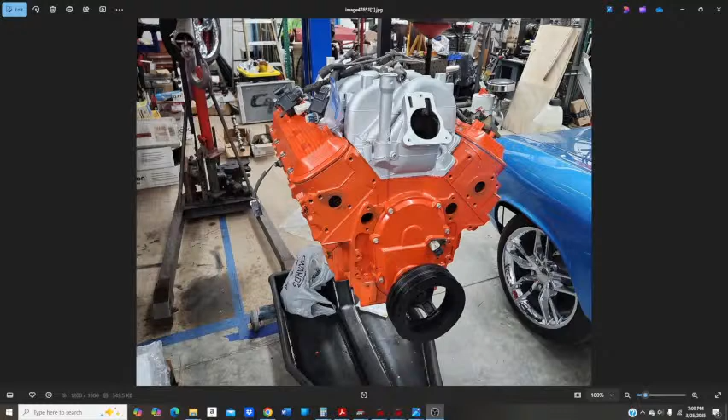So here's Scott's engine, the 8.1 liter. Being we were putting it in an earlier Chevy truck, we decided to go back with orange rather than the corporate black. Yeah, it's all together and it's up at Doug's, and we're getting ready to install that bad boy - it'll probably go in next week.

Probably this week will be tearing it down. I'm gonna end up having to pull the entire front cap off - some of the panels need to be blasted and rust repairs done, stuff like that. So I figured it'd just be easier to go ahead and pull the whole front cap off the truck, that way I can get the motor and tranny out and put the new motor and tranny in using Doug's fork trucks. That should make it a lot easier to deal with.

So that was one thing I wanted to show you. Wanted to show you Chuck's project, get you caught up where we're at with it. Let me fix some videos here, some pictures here - this thing's backwards. How's that? All right.

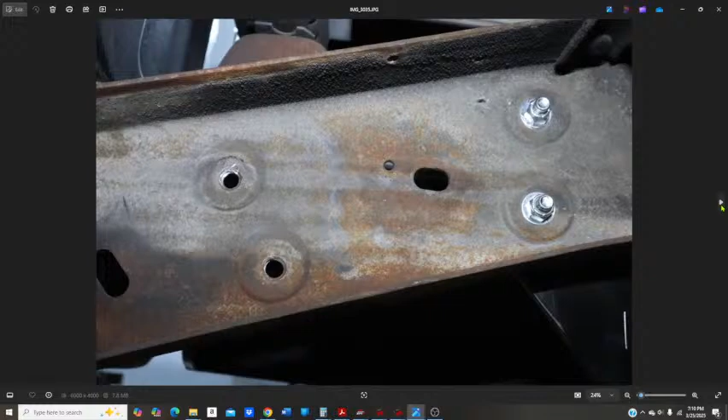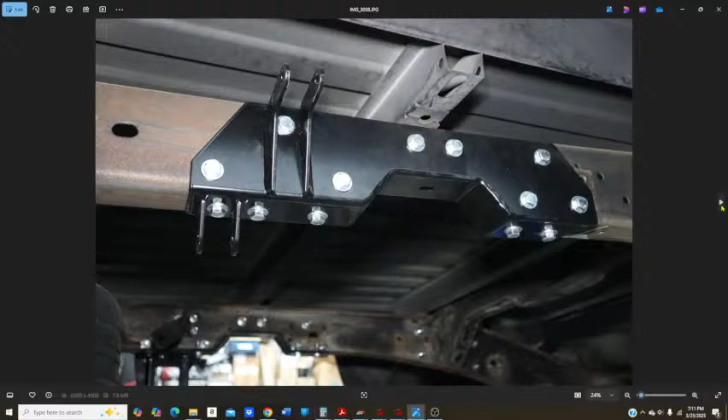So show you some of the older pictures we had. Here's the frame bolting in some of the suspension joints where you had to drill holes and mount brackets and stuff. You had to take the leaf spring stuff off because it's going to be a 3-link when we're done. Had to C-notch the frame, which was a bolt-in kit also, which was really nice.

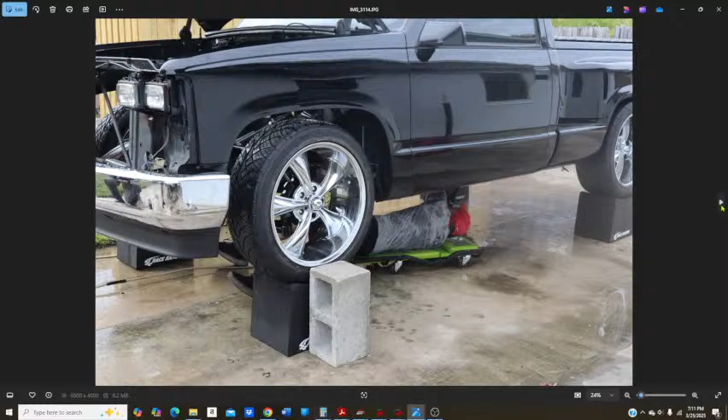We get through these pictures - we had it kind of crazy. I should have thought about this at first, I said I thought we could scrape the frame, and Chuck and Dave kind of vetoed me and said no, we need to roll this thing out and pressure clean it. So we hung the suspension back under it, got out on the driveway, and Chuck went nuts in there with the pressure cleaner. Just a couple pictures we took of that stuff.

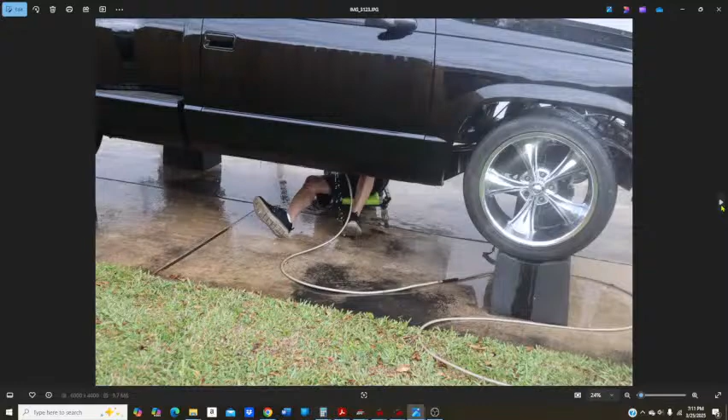Didn't need to go that far back.

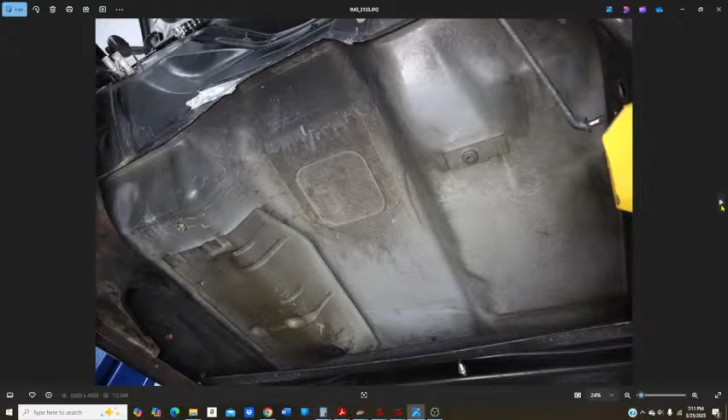So it looked pretty good after it started drying up, and then he went through and painted the entire chassis with POR 15. I didn't realize I started back that far.

These are all pre pictures. Here's some with the old brakes, and here's the new front brakes all mounted up and everything permanent, and the rears. So it's got 14-inch rotors front and back now, 6-piston calipers in the front, 4-piston in the rear.

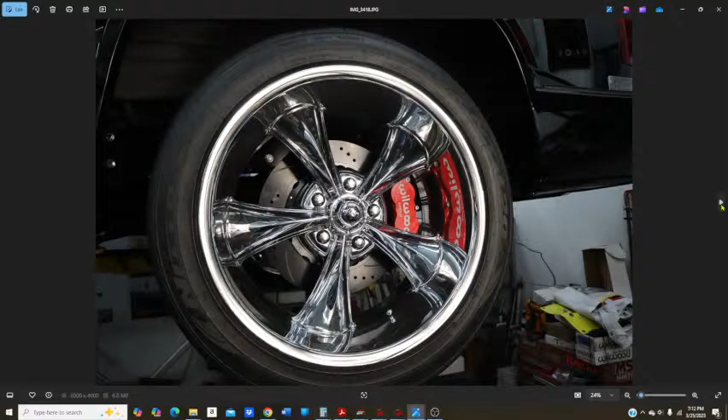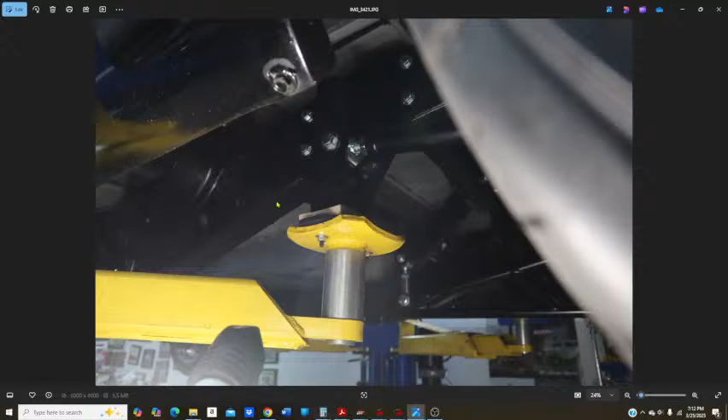You can see the frame now is all painted up, got the coilovers in and everything. We only went with single adjustable because he's really not going to track the car, it's mainly just going to be show and cruise and stuff. There's that bracket for the trailing arm and frame painted, diagonal and stuff, so you can kind of see where we're going with it.

Front suspension all back together now with the new spindles and all that. The tie rods are going to get a single adjuster there, those haven't come in yet. And then just some pictures from underneath.

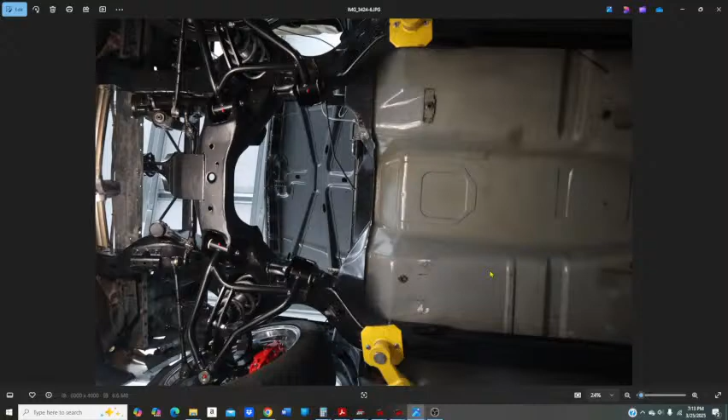Looks a lot nicer with the frame all painted. And that's the underside of the cab, which Chuck just washed with mineral spirits and soap and got all the road grime off and stuff. And the factory epoxy on the floors was still in really good shape, so that came out nice.

Got a couple little touch-ups where we cut some heat shields out. The truck bed still needs to be painted, but that's the picture.

So it's got outer control arms, a third link in the center, and then a Panhard bar in the back, so it should be a really, really good ride. We went ahead and welded the tubes on the 10.5-inch rear end, we're going to stay with that. It's got 3.73 gears, should be fine for the twin turbo motor.

So there's a picture. Obviously you can see this section and the firewall is what we need to have painted now. So that's where we're at with that. That'll go down to the paint shop and they'll do that in gloss black.

He's already got the inner fenders. We're going to do them in gloss black, and then we'll be ready to start mounting the engine and transmission in that thing. So that was a good progress made. Now it can be rolled around the shop and stuff like that.

So that was pretty much most of the stuff this week. Now I guess we'll kind of get into the Holley stuff. Let's see, I want to start out with Mike's car.

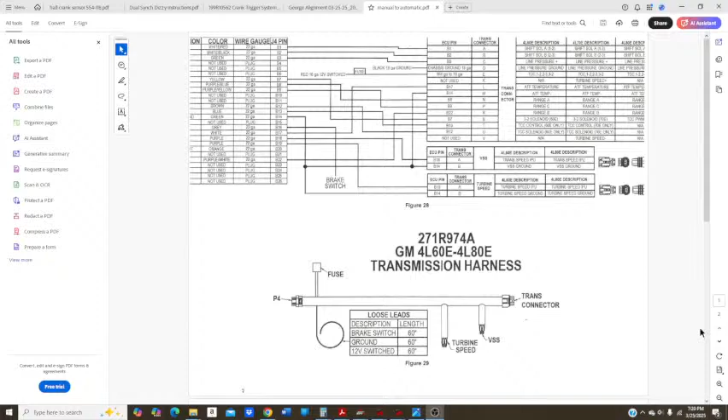If you guys remember from last week, we were working on Mike's 66 Chevelle, trying to get the transmission to shift. This was the Holley transmission harness for operating that, and then we were talking about this deal here, which is something I came up with.

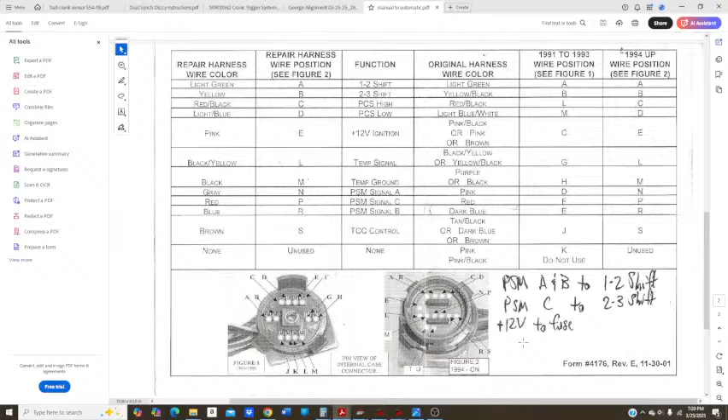Where you could make an automatic transmission into a manual shift by using the pressure switch manifold to energize the shift solenoids. So we went ahead and did this with Mike's car.

We went out on Saturday and did some data logging, and I wanted to show you this, it's pretty good stuff. One issue we had was we knew the Holley would data log the output, the command to the 4L80, and this teal line represents the shift position, the command the transmission is sending. But our problem was we still didn't know what the transmission was actually doing.

So one of the things I did was take two voltmeters and back probe the J4 connector on the Holley, with the ground side of the voltmeter going to 12 volts. Now we could watch the two shift solenoids.

The way the 4L80 works is you ground the 1-2 solenoid, and that gives you first gear. In second gear, neither solenoid has a ground. In third gear, the 2-3 solenoid is grounded and the 1-2 is not. Then in fourth, both solenoids are grounded.

We were able to drive the car around and watch this. I could have created a file and put the data in the Holley data log, but we were trying to do this quick and easy, so it was just easier for me to sit in the passenger seat and read the voltmeters. Unfortunately it wasn't good for demonstration tonight, but anyway, let me go back to the data log.

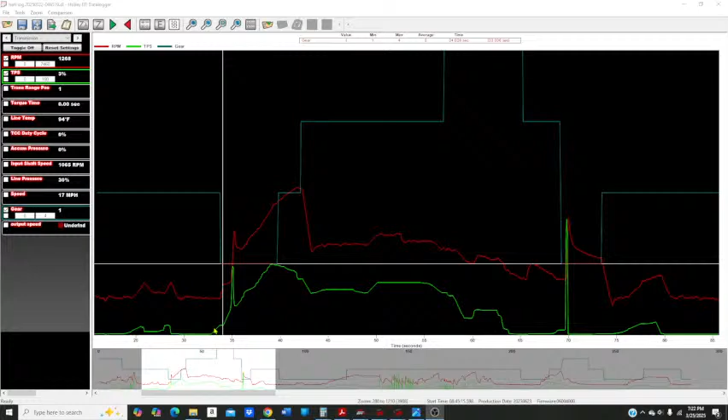So here's our cursor line where we're at, 1200 RPMs, 3% throttle, in first gear, rolling about 17 miles an hour. The green line here is speed. So we can go back to here. Now we're... oh, I don't have speed on there, sorry. So there's speed, so we're actually driving down the road.

So there, Mike puts it down into first gear. You can see over here the transmission is looking at the pressure switch manifold, and that's telling the ECU what gear we're in. So we're in first gear because it sees pressure through the valve body. And then we're accelerating through.

You can kind of see on this gold line here, we're starting to go faster. Then we get up to here, and right here Mike shifts the car into second gear. But you don't see, on this red line, a drop, because it didn't shift. Even though the computer commanded second gear, and I'm watching the valve body and the voltmeters, both voltmeters went open, so both shift solenoids were open, but the car still did not shift.

So then we continued on a little bit faster. He revved it up to almost 4,000 RPM. It still didn't shift. He finally pushes it into third. The Holley sees the pressure switch manifold shows that it's now in third gear. The voltmeters are now showing me the 1-2 solenoid open, the 2-3 solenoid grounded, commanding third gear. You can see by this red line here a significant drop in RPM, so it did make the shift. Let me make that a little bit more pronounced for you.

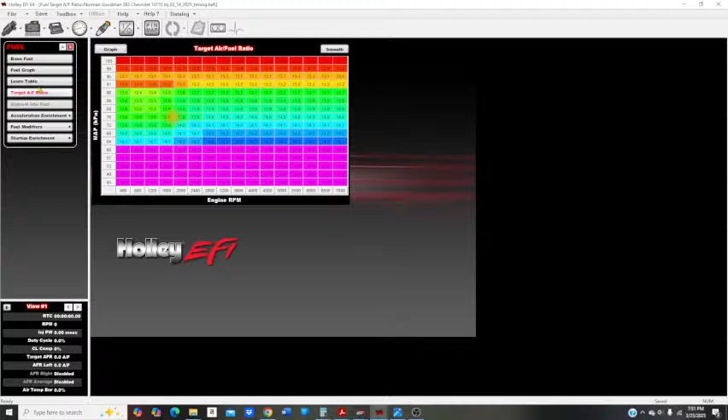Everything was pretty good. There was a fuel graph in here, and that one was already smooth. All right, so let's go to the data log.

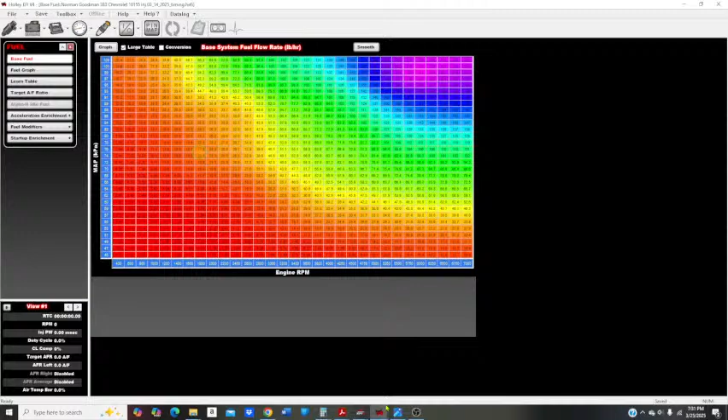So we go for a ride in this car, and sure enough, it's got some anomalies here. I really didn't notice anything here, but here we're at 1600 RPMs. We don't have speed because it's a manual transmission, but it was off the target a little bit.

Blue line here, kind of hard to see that blue line, but that blue line is the target AFR. Let me switch the screen to white, see if that's any better. Well, we'll switch back and forth because it's better for the fuel. So here's our target AFR line, and this green is where we're actually driving. So let's go back to the black screen. Why didn't it go back? All right.

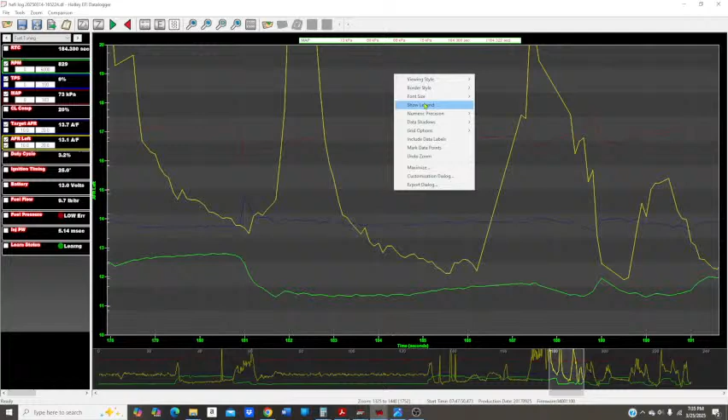If you go like in here, you can see, let me switch this back to white again. You can see here there's dips in the red. Those are load positions. So the load was changing, RPM was changing, but the computer still saw that it was in idle circuit. Anything under 1% TPS is idle. So at that point, you got idle compensation, timing compensation coming in. So it's jacking the timing around and doing a bunch of crazy things.

So I just kind of snugged it down. We limped it back to the house. I reset TPS, and we drove the car around, and it was perfect.

So again, one of the things that, here he thought that something happened to the tune. It got corrupt, had maybe a bad injector or a vacuum leak. He wasn't sure what was going on, but luckily, rather than going into it on his own, he brought it over and I took a look at it. And like I said, we figured it out. Luckily, I didn't have to spend a lot of time on it.

It came up pretty quick, but it just goes to show when you are doing tuning how critical it is to make data logs so that you can hunt for anomalies. Now, I didn't see the TPS at first, but before I dove in and decided to start changing stuff, I started going PID by PID, sensor by sensor, to see what was going on.

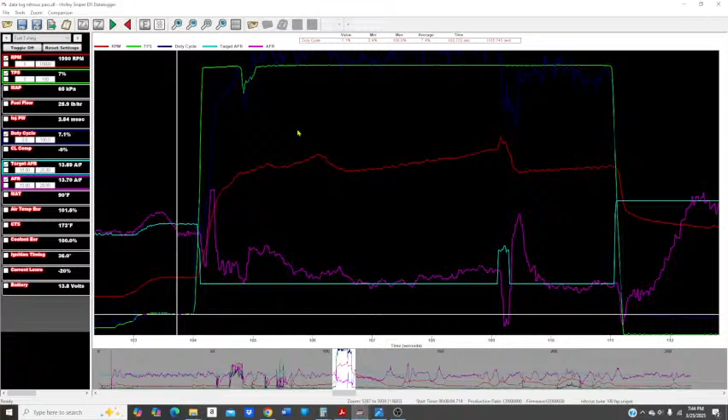650-ish horsepower, all depending on the efficiency of the engine. So what we can see here, let's put the cursor back here. So here he's at 1990 RPMs, 7% throttle. I don't think the truck has a, let's get this closed loop comp off, we don't need the closed loop comp on it. I don't think he's got a trans brake, I think he was just power braking it.

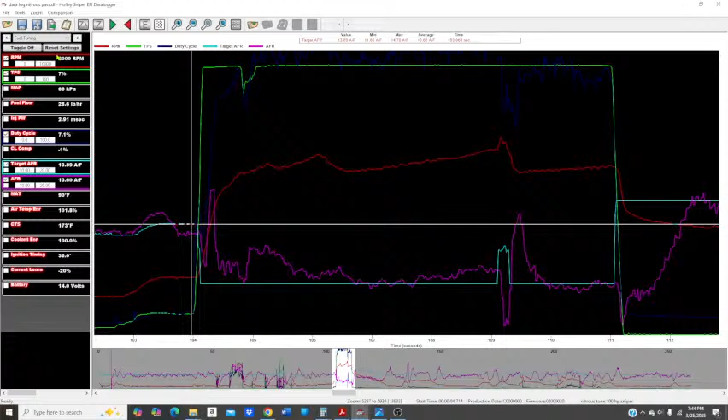So tree goes on. Let's see, we don't have nitrous on this one. Let me switch tunes here where we get the one with nitrous tuning. So we have nitrous also. Stage 1, base fuel, we don't need base fuel pounds. Fuel flow, we're good there. We have target and actual, okay, we're good there.

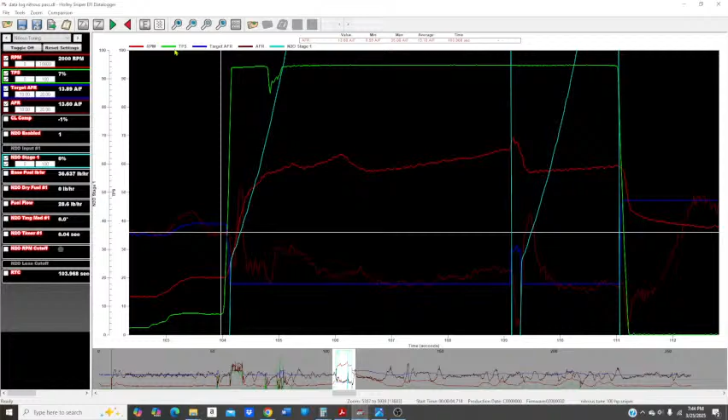This one does not have duty cycle, so let's add duty cycle real quick. So we go into editor, go to nitrous, let's get rid of real time, and we want to put duty cycle of the injectors, because our concern was if we're running out of injector while the nitrous is on. Well, I didn't drop it in the right spot. Where was it? Okay.

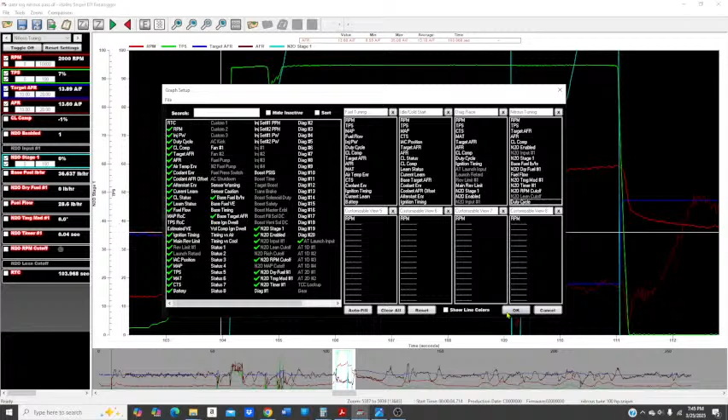All right, so this purple up here, good, this is a much better color. This purple is the injection, fuel injector duty cycle. So here he's on the starting line, takes off, stomps the throttle. This teal line here is the nitrous coming on. Now it's got a progressive controller on it in the Sniper. That's the beauty of all the Holley products.

They've got progressive controllers built into the software. So we got that progressive going, but it's a pretty steep ramp. And right here, it tries to spin the tires, and so he kind of pedals the throttle a little bit, catches the tires, and keeps going, and the nitrous keeps engaging.

But you can see at our duty cycle down here, 101 duty cycle, so we are out of injector. And you can see the motor's a little lean right there. And as we go through, it kind of stays right about that same point, but the AFRs are a lot better.

And then out here, you'll see the red line right there. Let's go back here to that point. There, the motor hits 6,900. So at that point, what that is, when it shifted into 2-3, the transmission flared on the shift. So the transmission may need a little bit of cushion there, which then it over-revved, and there's an RPM safety on the nitrous, so it shut the nitrous off. And then once the transmission shifted, then the nitrous turned back on, and the progressive controller ramp came back in. So just kind of showing you how much information you can get on here.

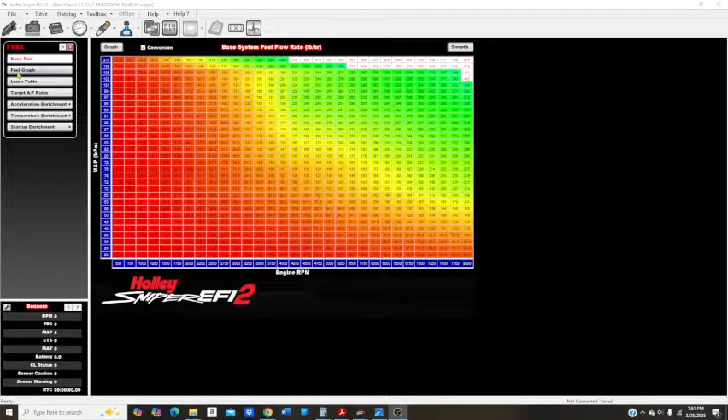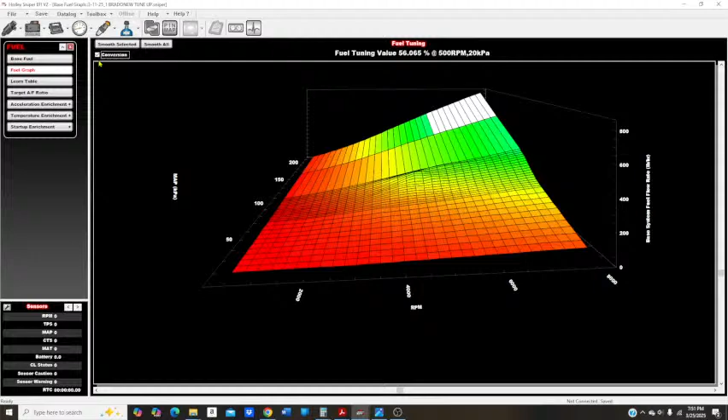So we pull up the fuel graph. You can see in the center here, there's a pretty big bump in there. And the reason that is, normally you can put in a conversion -- it's not as exaggerated in pounds per hour, but in VE, it's a pretty crazy looking hump.

So what happened was they took the truck to Run to the Sun, and he's cruising up and down the highway, and he said the more they drove it, cruising-wise, it started running pretty terrible.

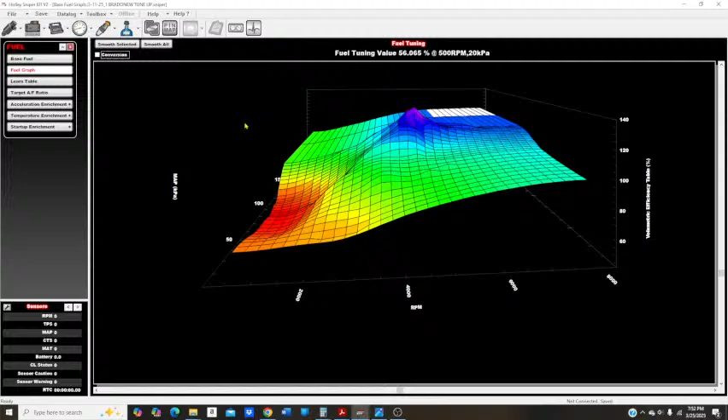So what I've found in past experience is when you have a camshaft that's got a lot of overlap in it, what will happen is with the closed loop and learning -- so on the Holley system, kind of like an OEM, your closed loop parameters is your short-term fuel trimming. That's what I call a knee-jerk reaction.

The computer sees the motor's lean, it makes a quick adjustment to that cell. It sees the motor's rich, it makes a quick adjustment to that cell. It doesn't record that correction, it just makes it right now. And then when you move away from the cell, it goes back to the original base tune.

Now your learning parameters, just like in an OEM computer, would be your long-term trim. So what long-term trim or learning does is it watches closed loop, or short-term trim, and it says, hey, whenever you're on this cell, you're always adding, so let's go ahead and learn and add a percentage to that cell so you don't have to work so hard closed loop.

And that's how that all works. So the closed loop is a real quick, not-recording deal. And then the learning watches it and says, hey, you're always skewing lean, you're always skewing rich on these cells -- let me go ahead and make a correction in the learn table over top of the base table. That will make it so the closed loop -- the whole idea is to have the least amount of adjustment.

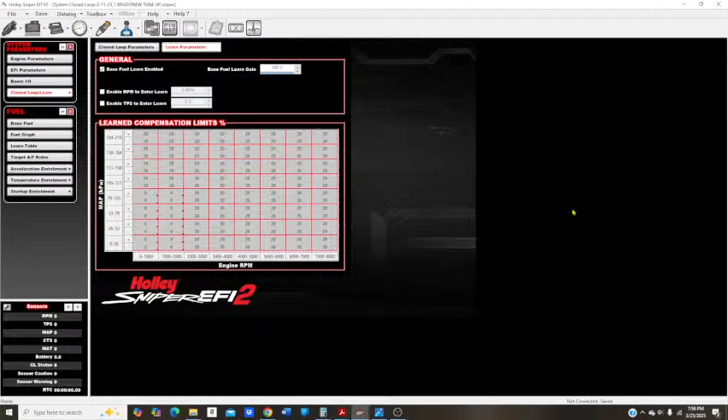So that's what I did. We sent them the file back and installed the tune. The rest of the weekend, he said the truck drove like a million dollars. So again, using your data log and stuff like that, you can come up with this stuff, and it just helps.

It aids in making you a tuner, or a better tuner, with minimal amount of experience. It works really well. The nice thing about all this, when you're in a carburetor, you're going by seat of pants. You might have a vacuum gauge on the car, you might have a wideband, but there's no recording, so you can't take your information and go talk to somebody and say, 'Hey, what do you think I should do here?'

I'm making adjustments, but it may not be working, or it is working, or whatever. The beauty of EFI is you can take your tune file and your data log file and send it to somebody like myself or any other tuners, or even guys that are just helping out, and we can together go over these files and all learn new tricks and new things we may not have been aware of before.

It just makes it so much easier to get your vehicle running properly, and all those fun things. So I just thought it was a good thing, where these are actual situations I've run into in the last two weeks, and I thought it would be a good case study so you guys could see how I used the information, made corrections, and solved the problem.

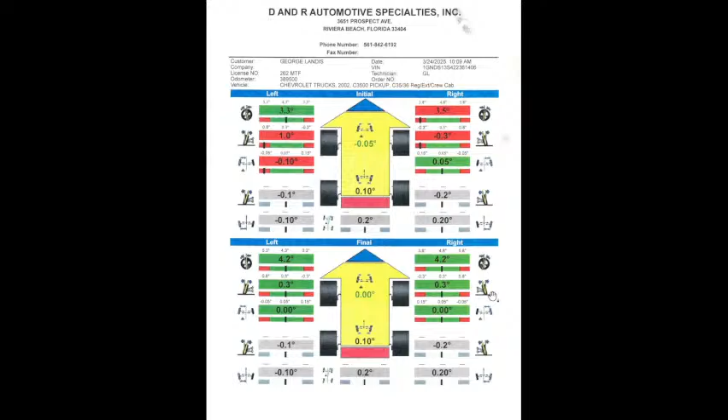But just wanted to show you, you can do an alignment in your driveway. If I had to put a level on there, I would have probably had it pretty darn close to spot on. So sometimes you can use other tools to do a job, you don't have to have a big fancy $20,000 alignment machine to get the alignment close.

Where I had it, it would have drove down the road. Well, it did drive. I had to drive 20 miles to the machine. Drove fine. Steering wheel was a little crooked because I didn't have it centered, but other than that it drove good, and it could have driven like that for a while and not wore the tires. So, but now it's spot on, and we should be in good shape for our Darlington trip. So, again, can't wait for that. We'll hopefully have a bunch of cool video when we get back, not next Tuesday, but the Tuesday after.

Which will be the 9th, I think. So we'll have some in-car video going around Darlington in the Cup car, and we're going to be in the fan zone, so we'll mingle with fans. We're going to have the Stock Car Classics Facebook club, that's where I'm part of that, and we're supplying the throwback for the racetrack.